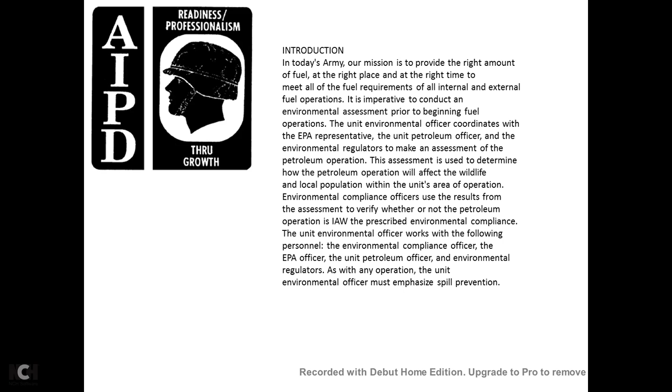Environmental regulators, as with any operation, the unit environmental officer must emphasize spill prevention. The unit environmental officer is responsible for knowing and governing the spill contingency plan, the installation policy, the CONUS policy, the OCONUS policy, and the host nation policy relevant to the area in which the petroleum operation will be conducted.

The Quartermaster Corps is tasked with providing fuel support for deployments such as Desert Storm, Desert Shield, Bright Star, JRTC, NTC, and numerous humanitarian assistance operations. In each of the deployments, either single product or multi-product fuel was dispensed in support of the petroleum fuel operations.

The petroleum NCOIC and petroleum OIC are often thought of as some of the most insignificant players when it comes to planning a field training exercise. In major deployments they are often even left out of the initial planning phase. The bottom line, they are subject matter experts. The petroleum officer is more knowledgeable and will have the easier way to train the subordinates to perform their daily mission. It is imperative that the subordinates under supervision understand their responsibility under the Army Environmental Stewardship Program.

Your soldiers definitely need to be educated in the event that there is some type of fuel spill. Generally, with fuel spills, one of the biggest problems is containment. It is your responsibility to ensure each one of the soldiers is able to apply environmental awareness techniques. The soldier must be able to make sound decisions that will not cause harm or damage to the training site or deployment area. In the event of a fuel spill, every measure of effort must be taken to ensure that the spill is properly contained and cleaned up. Remember, accurate records and reports on receipts, storage, and shipments of petroleum products must be maintained at all times.

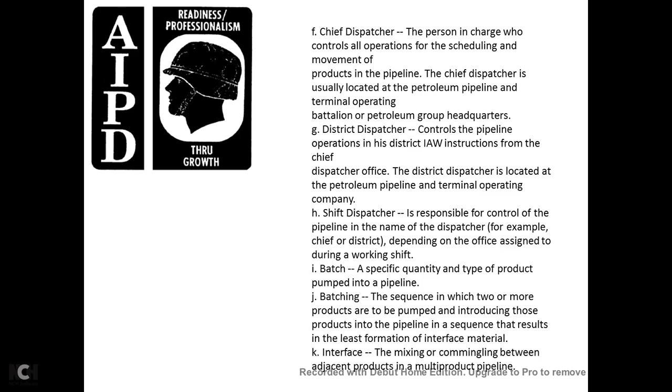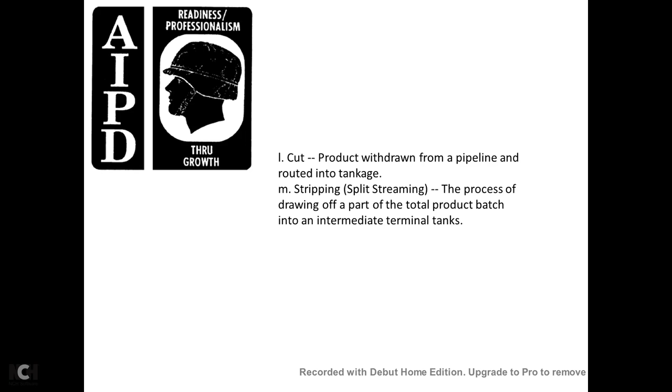Batch: a specified quantity and type of product pumped into the pipeline. J, batching: the sequence in which 2 or more products are introduced into the pipeline, in a sequence that results in less formation of interface material. K, interface: the mixing and commingling between adjacent products in the multiple product pipeline. L, cut: product withdrawn from the pipeline and routed into tankage. M, stripping, or split streaming: the process of drawing off part of the total product batch into intermediate terminal tanks.

2. The Chief Dispatcher function. Now that you have become familiar with the terms related to batching and scheduling, you will now be responsible to coordinate with the Chief Dispatcher. A Chief Dispatcher is responsible for knowing the following:

1. The storage capacity of each storage location connected to the pipeline, the line fill of the pipeline, and the throughput for each section of the pipeline. Working pressure for each section of this pipeline, maximum discharge pressure that each of the pump stations can develop, number and location of each of the pump stations, 5, stock and status, daily requirements. The chief dispatcher and his office must also determine, coordinate, and perform the following.

1, type and quantity of product to be pumped, destination of each batch, interface size and estimated arrival times at the pump stations and terminals. 4, starting and stopping times of all pumping operations, pump station pressures and flow rate. 6, type of cut to be made with each of the product interfaces.

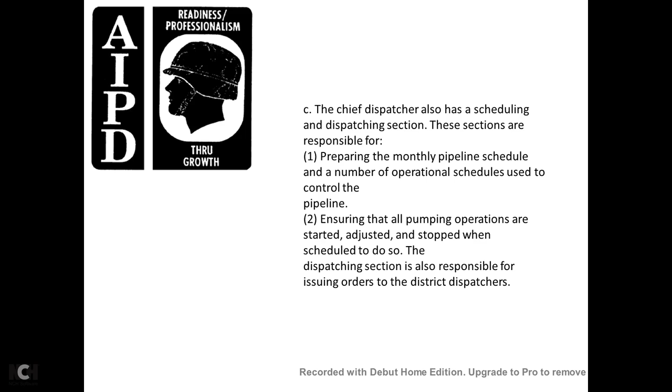Information must be reported daily to the higher headquarters, for example, the HHC or the QM Petroleum or Water. The chief dispatcher also has the scheduling and dispatching section, and the sections are responsible for preparing a monthly pipeline schedule and the operational schedule used to control the pipeline, ensuring that all the pump operations are started, adjusted and stopped when to do so. And the dispatching section is also responsible for issuing orders to the dispatcher.

3, the dispatcher function. The dispatcher controls the pumping operation of the district according to the instruction of the chief dispatcher. The district dispatcher has certain freedom of action in an emergency. The district dispatcher's emergency responsibility is as follows. To isolate the affected section in the case of a line break, divert the upstream pumping into an empty storage tank, and shut down the line. C, to inform the chief dispatcher's office of all the shutdowns, identify the shutdown section and take action.

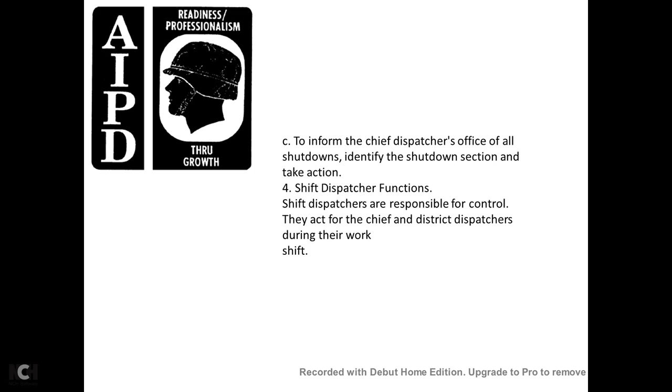4, shift dispatcher function. Shift dispatchers are responsible for control of the activities of the district dispatcher during their work shift. 5, batch schedules. Products likely to be batched in military multiple product pipelines primarily include mogas, diesel fuel, and jet fuels. Products such as kerosene have been used as a buffer at times in some pipeline operations, but it's not common practice for use in the military system.

Batch sequences are not fixed, however, the batches should be arranged to protect critical products and product interfaces. In addition, creating a usable interface with the batching schedule also aids quality and quantity control. Sequence products in adjacent descending or ascending order of quality. Products must be closely related in quality and gravity, with the least difference in gravity in the sequencing, and the schedule puts light products first, then heavier products.

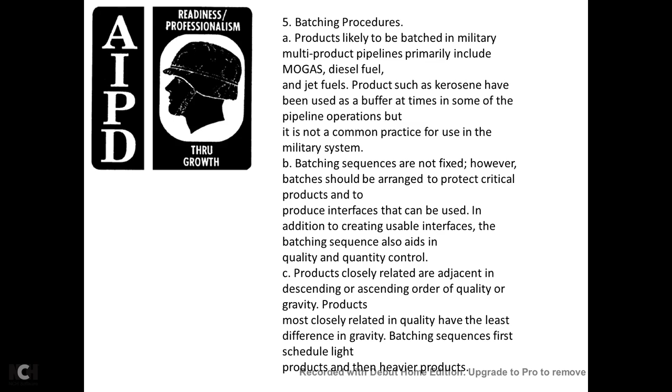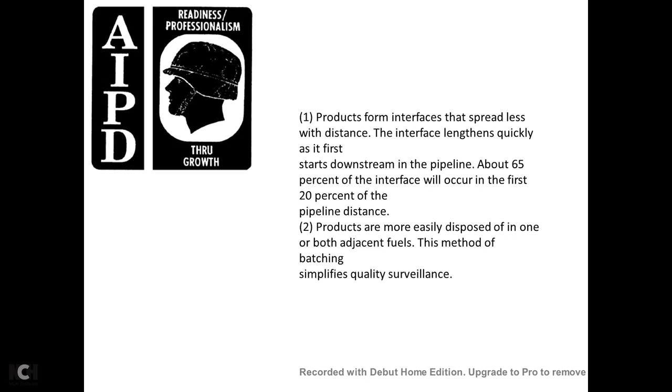Product interfaces spread less with distance. The interface lengthens quickly at first and then slows downstream in the pipeline. About 65% of the interface will occur within the first 20% of the pipeline distance. 2, the products are more easily disposed of into both adjacent fuels, and this method of batching simplifies quality surveillance. 6, the interface is the small mixture of the 2 adjacent products. Product cuts are then used in dealing with the interface in the multiple product pipeline.

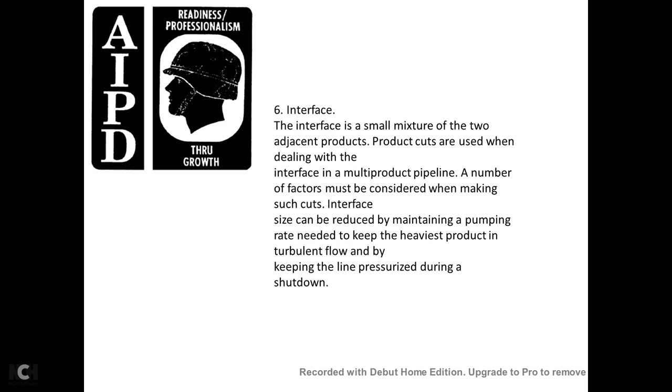A number of factors must be considered when making such cuts. Interface sizes can be reduced by maintaining a pumping rate needed to keep the heaviest product in turbulent flow, and by keeping the lines pressurized during a shutdown. 7, the batch designation. Product batches are identified by use of the standard identification system. The system identifies the product, the product batch, and the quantity.

The product code number, the first part of the numerical batch designation, is one of the following commonly used codes: mogas 1, jet fuel 2, diesel 3, or JP4, JP5, JP8 for jet fuel. Other products would be assigned continuing numbers by the dispatcher. A batch number forms the second part of the identification number, with numbers assigned from the start of the fiscal year, beginning with number 1 for each fuel. For example, 2-6 represents the 6th batch of jet fuel for the fiscal year.

The dispatcher may elect to run the batch numbered in sequence regardless of the product. For example, 261, 262. The third number is used to represent the size of the quantity for the batch, in MBBLs. Note that 20 MBBLs represents 20,000 barrels. Example: 24020 equals JP8, 40th batch, consisting of 20,000 barrels.

Detection of batch changes of the product in the pipeline must be determined where one batch ends and another batch begins. The following methods are used. Gravity: a difference of the API or specific gravity between the two products will identify the change of product. Color change: when the color differs due to the lead, the difference of the products may be determined. Liquid buffers: products such as mogas may be used to separate the different products.

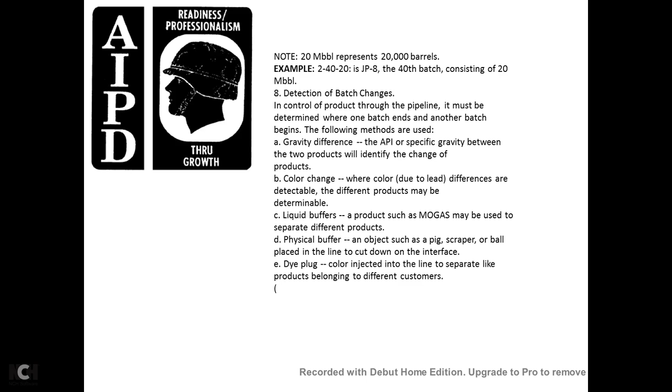Physical buffers: an object such as a pig, a scraper or a ball placed in the line to cut down on the interface. Dye plug: a color injected into the line to separate like products belonging to different customers. Disposing of the interface: there are three alternatives to disposing an interface. The alternatives are as follows.

A, the interface mixture is cut into one or the other adjacent product, a head or tail interface cut. B, the mixture is divided between the two adjacent products, usually at a mid-gravity point. C, the whole interface is taken into the slop tank to be blended at a later time. Note that this procedure is used in the commercial industry, but is not in practice in a military system.

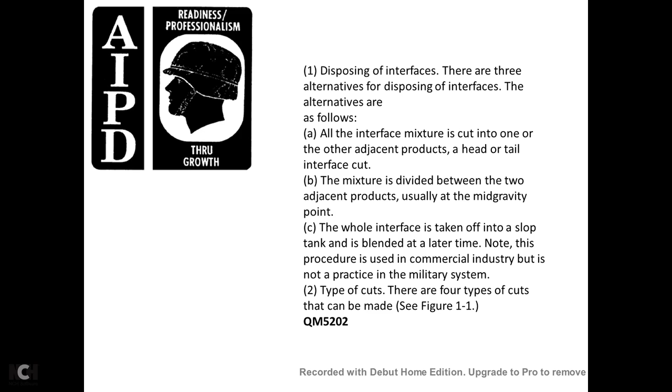Types of cuts. There are four types of cuts that can be made. See figure 1-1. You have the fuel B heart cut, interface tail cut, interface center cut, the interface head cut, and the heart cut. It shows fuel B with the interface with the pipeline wall and fuel A with the pipeline wall.

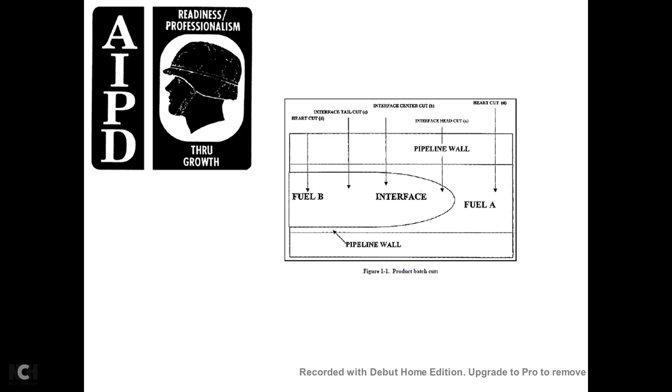To find the midpoint, take the difference between the observed API gravities, 2.6 degrees, divide it by 2, and add the result to 53.8. For example, 2.6 divided by 2 is 1.3. 53.8 plus 1.3 is 55.1. The midpoint cut is 55.1 degrees API between the JP4 and the MOGAS.

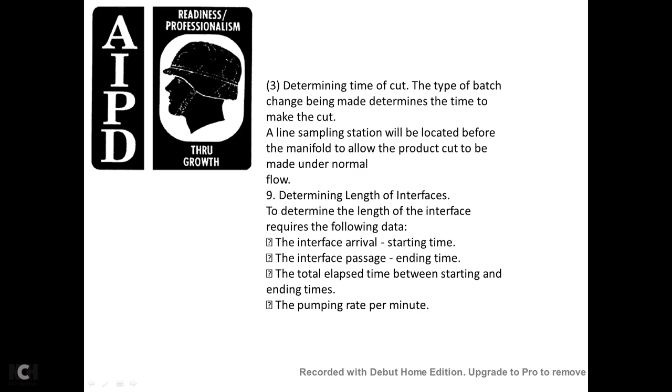Interface tail cut: made in the last interface mixture before the pure product cut. D, the heart cut: pure product cut made before and after the interface. 3, determining the time of the cut: the type of batch determines the time to make the cut. The line sampling station will be located before the manifold to allow the product to be cut under normal flow. Determining the length of the interface requires the following data: the interface arrival start time, interface passage end time, total elapsed time between the start and end time, and the pumping rate per minute.

Example: the interface arrives at the pump station at 19:30 and passes the pump station at 20:05. The pumping rate is 2,200 barrels per hour. 60 minus 30 is 30 minutes. 30 plus 5 is 35 minutes. From 19:30 to 20:05, the interface takes 35 minutes to pass.

2,200 barrels per hour divided by 60 equals 36.666, or 36.7 barrels per minute. Total interface: 35 times 36.7 is 1,284.5 barrels.

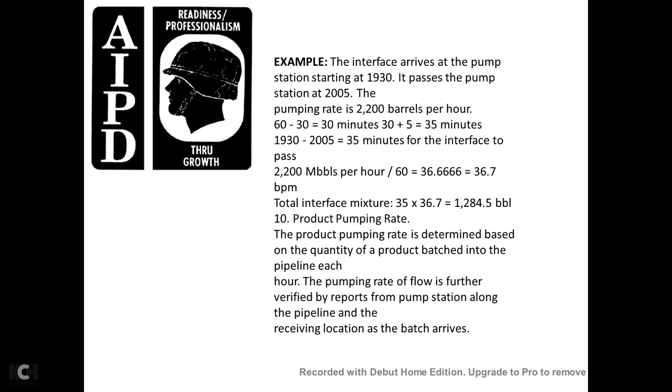Product pumping rate. The product pumping rate is determined based on the quantity of product batched into the pipeline each hour. The pumping rate is the flow. The pumping rate is further verified with the reports of the pumping stations along the pipeline and the receiving location when the batch arrives.

Example: a batch of 2,200 barrels of product is started in the pipeline at 0100. The product batching is completed at 0200. This batching requires 1 hour. Determining flow rate per hour by dividing quantity by time: 2,200 barrels divided by 1 hour equals 2,200 barrels per hour.

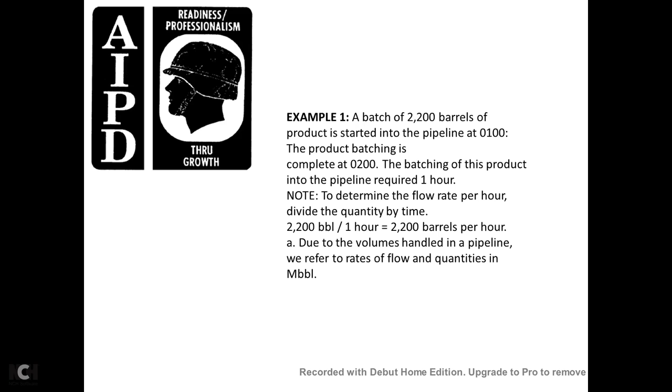Due to the volumes handled in the pipeline, we refer to rates and flow quantities in Mbbl. For example, 22,000 barrels divided by 1,000 equals 22 Mbbl.

Knowing the rate and product flow arrival time, each pump station and terminal is notified of the expected arrival time for pipeline operation planning purposes, for a 20-hour day. This allows 20 hours for pumping and 4 hours for maintenance during the 24-hour day.

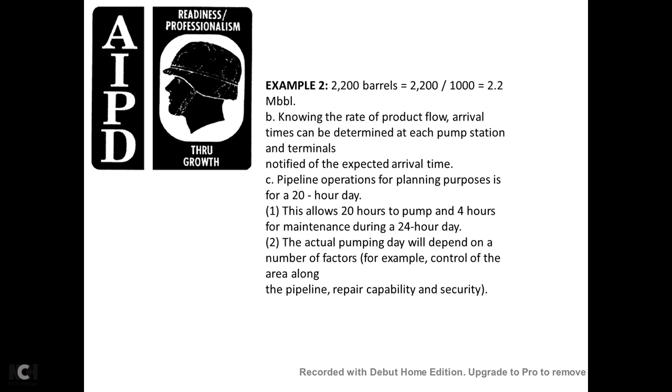The actual pumping day will depend on a number of factors, for example the control area along the pipeline, the repair capability, and security.

The consumption graph: the dispatcher office maintains the consumption graph for each product handled, by location within the area of responsibility.

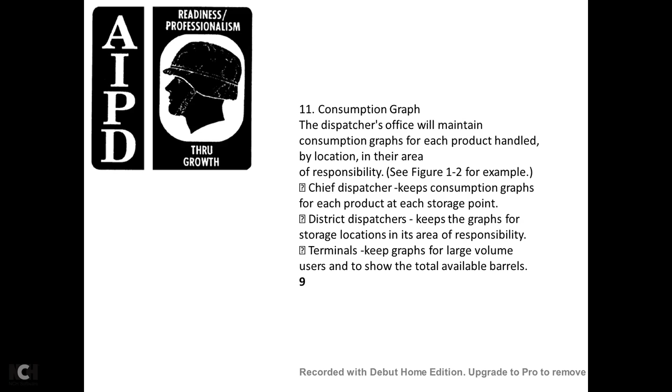See figure 1-2. For example, the chief dispatcher keeps consumption graphs for each product at each storage point. District dispatchers keep graphs for storage locations in their area of responsibility. Terminals keep graphs for large volume users to show total available barrels.

The consumption graphs are valuable, showing present and projected stockage. Should a trend of consumption suddenly increase or decrease, the graph must show the total barrels of product at the storage point.

The total barrels plotted on the graph must be adjusted by what is taken in, taken out of, or placed into service.

For example, for tank cleaning, allowing for vapor space, calculate 5% of the total available storage capacity when the tank is out of service. You cannot count on that storage capacity.

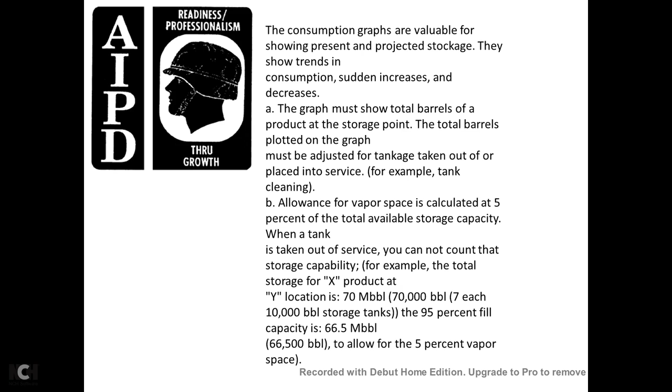For example, the total storage of product X at location Y is 70,000 barrels, for 7 tanks of 10,000 barrels each. For 95% fill capacity, that is 66,500 barrels, allowing 5% for vapor space.

Figure 1-2 shows the consumption graph. Example: to solve for vapor space, you must multiply the vapor space percentage by the number of MBL barrels. Vapor space at 5% equals 0.05 times 80 MBL. 80 times 0.05 is 4 MBL.

The graph is plotted for the monthly period, showing the starting point of 0001 hours, one day after 0001 hours. For the next diagonal line, the receipt is plotted at the end of the day, the vertical line from the issue line. The projected issues and receipts for the complete monthly period are shown with a dotted line.

The actual issues and receipts are plotted with a solid line. Note that by comparing the graph of anticipated versus actual issues and receipts, the dispatcher can see what adjustments need to be made.

The safety level shown at the bottom of the graph, the safety level number, or DOS, is established by the theater command. Safety levels are based on the previous month's total daily issue divided by the number of days during the issue period, then multiplied by the DOS required by the theater.

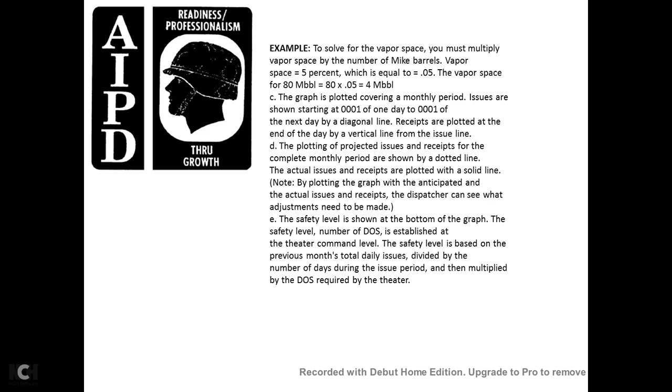Example: 150 MBL of fuel were used during last month's field training exercise, a month consisting of 30 days, with a safety level of 4 DOS. 150 MBL divided by 30 is 5 MBL. 5 MBL times 4 equals 20 MBL.

This gives a safety level of 20 MBL. For the monthly pipeline schedule: the monthly pipeline schedule shall be programmed for the movements through the pipeline of products with quantities required during the 30-day period. The schedule will show which products will be in the pipeline, as well as the time determining how long it will take the product to reach its destination.

The monthly schedule is merely a graph showing the line capacity in barrels, distance plotted against time, and the hours the pipeline is depicted on the graph. The number of hours the pipeline is used each day must be determined.

A pipeline could be operated for a maximum of 24 hours per day. For example, a 20-hour per day period starting at 0001 hours, ending at 2000 hours, will allow for 4 hours of maintenance for the military pipeline system.

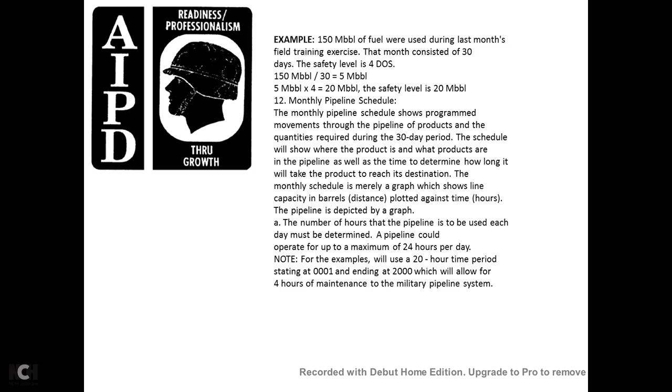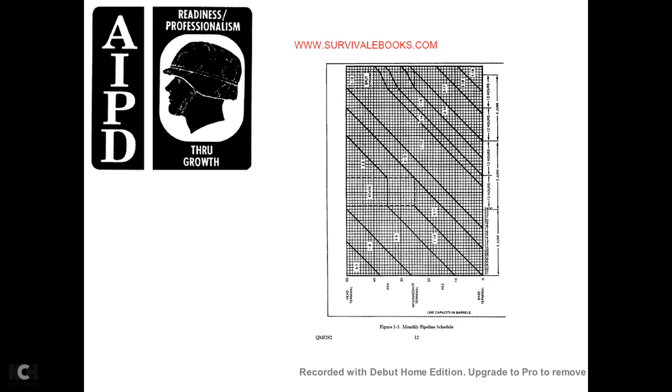However, where demand for the product is high, pumping could continue for 24 hours. To determine the product location in the pipeline, time and distance are involved. Figure 1-3 shows the monthly pipeline schedule.

This lets you know the product started in the pipeline, taking 10 hours to arrive at the head terminal. Take the 10 hours and add it to your start time of 0700 hours. This lets you know that at 1700 hours your fuel reaches the terminal.

Find out how many hours it will take the batch to just pass. Take the thousand barrels of the batch and divide it by the pumping rate to add the number of hours to get to the head of the terminal.

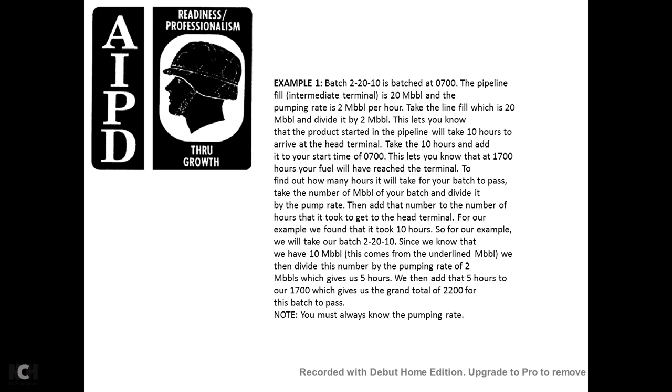For example, we found that it took 10 hours, so we will take a batch of 2, 20, 10. Since we know we have 10 thousand barrels, we divide by the pumping rate of 2 thousand barrels, which gives us 5 hours. When we add the 5 hours to our 1700 hours, we get a grand total of 2200 for the batch to pass. Note: you must always know the pumping rate.

Example: knowing the product started in the pipeline and the quantities placed into the pipeline can determine the time the total batch is placed in the pipeline, starting at 16 thousand barrels of jet fuel into the pipeline at 0100 hours, pumping at 2 thousand barrels per hour, with the last batch placed into the pipeline at 0800 hours.

If the shutdown affects the complete pipeline, the dotted line will extend to the base of the head terminal. The time shutdown started is marked with a second dotted line at the bottom, at the point in time the pumping operation starts up again. When the shutdown affects only part of the pipeline, this part is indicated with a dotted line showing the part of time the shutdown affects the pipeline.

Between the base and the intermediate terminal, only the product being pumped out of the intermediate terminal is affected. The head terminal is shown with a horizontal dotted line on the graph showing the intermediate terminals between the shutdown start time and the time when start-up begins.

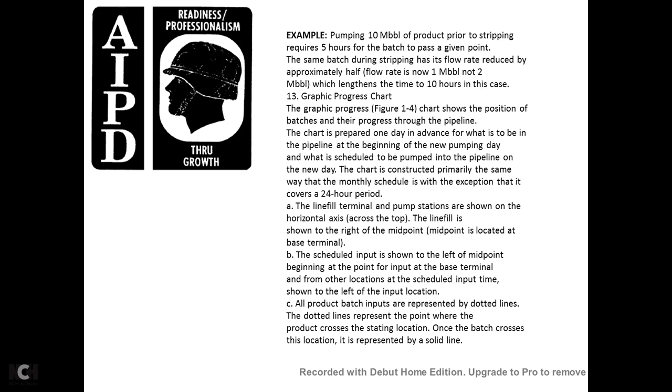The schedule input is shown with the left midpoint beginning with the point of input at the base terminal, with other locations at the scheduled input time. Input time is shown on the left of the input location. All products input are represented with dotted lines. The dotted lines represent the point where the product crosses at the start of the location. Once the batch crosses the location, it is represented by a solid line.

Figure 1.4 shows the graphic progress chart. There is no prescribed format for the daily pumping order. However, it should be written in such a manner that personnel working on the pipeline understand exactly when and how it is to happen. Figure 1.5 gives a few general guidelines for preparing the order.

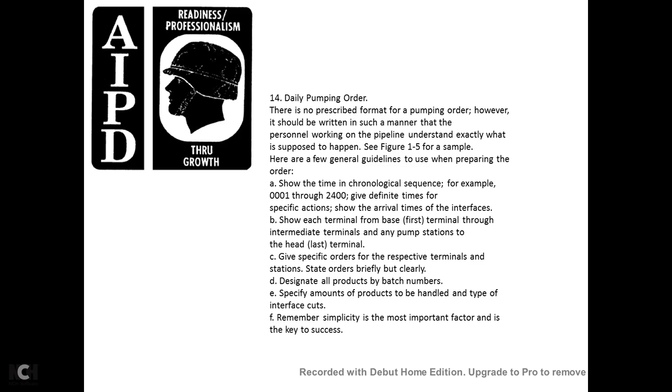Show the times chronologically in sequence, for example 0001 hours through 2400 hours. Define the specific times for actions, showing arrival times and interface locations for each terminal, from the base terminal through the intermediate terminals and any pump stations to the head terminal. Give the specific order for the respective terminal stations, stated briefly and clearly, designating all products by batch number and the specific amount of product to be handled by the interface cuts. Remember, simplicity is the most important factor and the key to success.